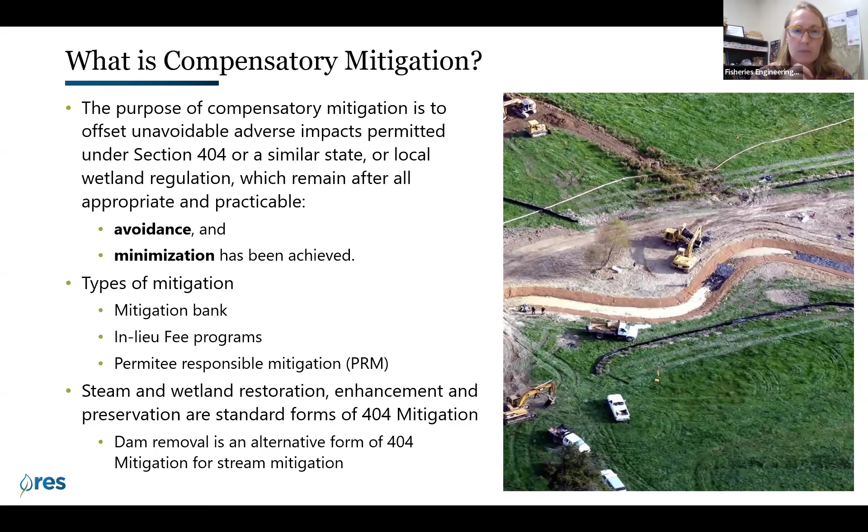All right, so just a little bit of vocabulary to make sure everybody's on the same page. Your IRT is basically your group of regulators, federal and state regulators, who are going to work with and develop your mitigation crediting, review your project, and all that sort of stuff. Your service area is basically where your impact happens, but then also where your mitigation happens. There's different definitions for different states on what that looks like.

So your debit, that's your loss. That's the amount of restoration or improvement that you need to have in your crediting process. And the credit is then just the gain, that unit of improvement of aquatic function at your mitigation site. So we're going to talk a lot about credits today. Creating that credit and what it means, you can sell it, you can buy it, you calculate it. So it's very important to understand that the credit is the gain that you're seeing at your mitigation site.

So the reason why having a known and established crediting process is important is an example like this here in North Carolina, where there was a process that was developed back in 2004, and some dam removals happened from it. But there was some discontent with what that process looked like. And so the Army Corps rescinded the guidance that was developed. And a lot of states were using North Carolina as a basis for their development of a program. It was a reference idea. A lot of people thought it was actually still pretty good.

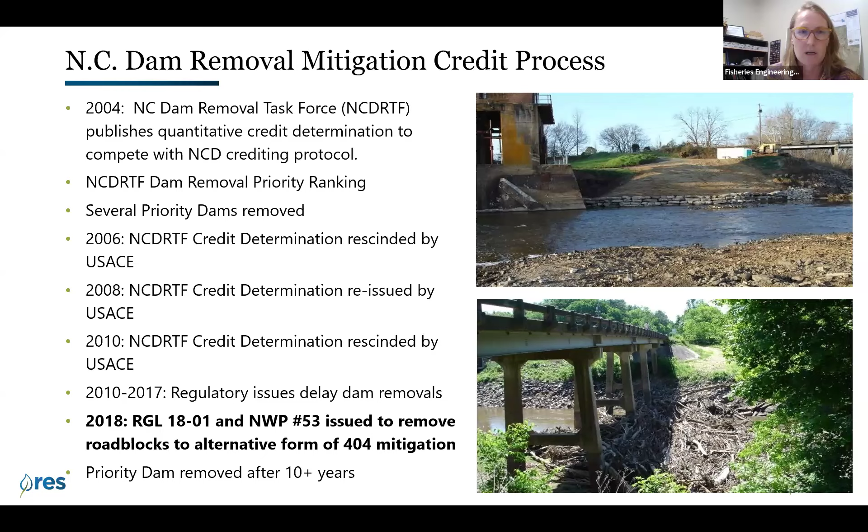So this document is hugely important to developing a mitigation credit process specifically for dam removals. So I want to go through some of the things that I think are pretty key in this document, but I definitely encourage everyone to download a copy of it and read it. So the title of it is Determination of Compensatory Mitigation Credits for Removal of Obsolete Dams and Other Structures from Rivers and Streams.

So the first two things I want to point out is that obsolete doesn't mean these are derelict dams or the ownership is unknown or anything like that. It just means that the owner no longer wants it. It could still have recreational value. It could still be doing something. It still could be providing hydropower, providing some benefit, but the owner of the dam no longer wants it. Therefore, it's considered obsolete. So just kind of think real big picture. Any dam really is applicable for this.

And the other structures part, that means we can talk about culverts. So perched or undersized culverts that are creating an impoundment or a backwater condition can also be considered for mitigation credits. I'm going to say dams and dam removal a lot, but really everything also applies to the culvert removal scenario. So just keep that in mind as well.

All right, so some of the four big takeaways on guiding the understanding about dams and how the Corps should regulate and view the removal of dams is that first, to understand that dams and other obstructions adversely affect stream functions, right? So when you remove that obstruction, you're automatically uplifting your stream condition, you're meeting goals for the Clean Water Act, and you're putting dam removal a bit on a pedestal to say this is a way to restore those stream functions.

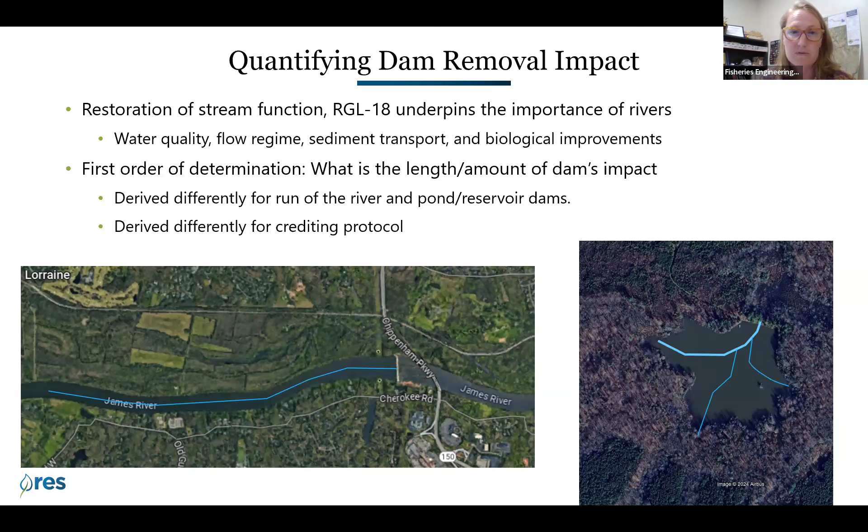And maybe you have to use your impoundment definition based on your state definitions of things. So there's a variety of things to consider based on your type of system and then your crediting protocol within your state or how you want to develop it.

So one of the common crediting methodologies right now is the stream quantification tool. And I mean this for streams, right? Not necessarily for dam removal, but for streams, the SQT is fairly prevalent right now. There are a few guidance documents that have been developed specifically for dam removal and how you apply the SQT to your dam removal system.

So I'm thinking specifically of the St. Paul and the Nashville districts, and they both do call out the application of that guidance document to culvert backwater conditions. If you're doing an SQT methodology in your state, there's regionalization within the SQT. So what a Minnesota dam removal looks like in the scoring might not be what another state's scoring looks like, because they're going to have parameters that are important to their state. So you have to think about that.

And because SQT is so specific in what it's looking at and measuring, the uplift you could see from a dam removal project might not be very well documented in the crediting process through SQT. So there's challenges of classifying function with that direct parameter measurement. That's because you're going from a lentic to a lotic system. It's a completely different system.

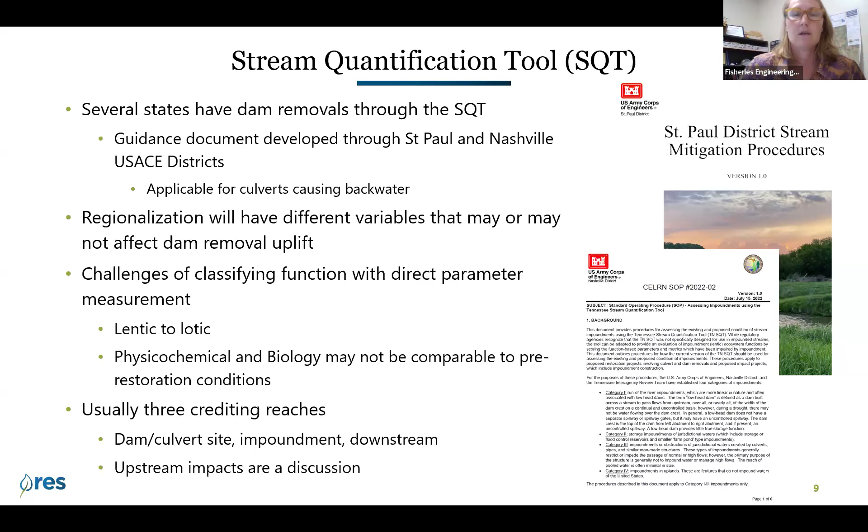So just, that's a word of caution. The one thing I do really like about it is that there's generally 3 reaches for the crediting. So it's at your impact site, so your dam or your culvert, the impoundment itself, and then very specifically the downstream reach of these things. So I do love that the SQT keeps that in mind. And then of course, there's also room for impacts even further upstream, which is a discussion you should have with your IRT on how you look at that.

Another crediting method is through the unified stream methodology. This is not as prevalent. I use it here in Virginia, which is where I'm sitting today. I think it's quite good. We went through a long process. There's some peers, some others in the state that really kind of kicked this off and did a great job developing some protocols for establishing this.

So under the unified stream methodology, credits are really based on your restored stream length. And I mean, restoration is a specific term. So you're meeting the restoration criteria for the state. And then you get to do some additional credits through what is called adjustment factors. Just for clarification, there is buffer crediting that also gets added into this, but we're not gonna talk about that. We're just gonna talk about the river today.

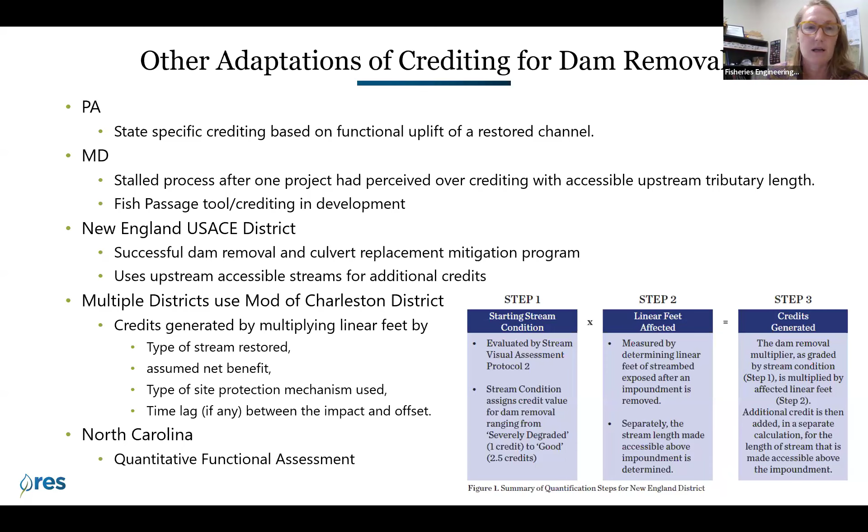It's a matter of starting the conversation. And so if you haven't done this in your state before and you want to get one done, your starting point is really with your IRT. Have that conversation about what you want to do and your starting point ideas of crediting. Now, especially if they've never done a dam removal, they could be very concerned about this being within your state allowance, especially if natural channel design is codified in how a restoration has to occur or how you evaluate your restoration.

So, really getting into this is an approved alternative, reference RGL 18, start talking about it, use examples from other states. Just bring in, this is not new, right? So bring in examples from other states, but start with that conversation.

Several states also have existing state dam removal task forces or aquatic connectivity teams. Those are great resources to maybe tap into to help develop the crediting, right? It's a big process to develop the crediting. It's not necessarily a one-person job. So you want to think about the unique cases for your site, your situation, but also the broad view of what's important in your state.

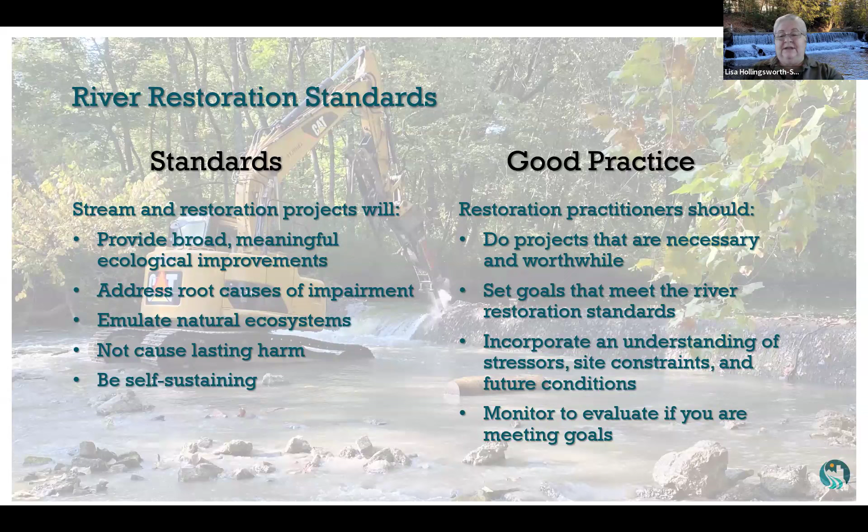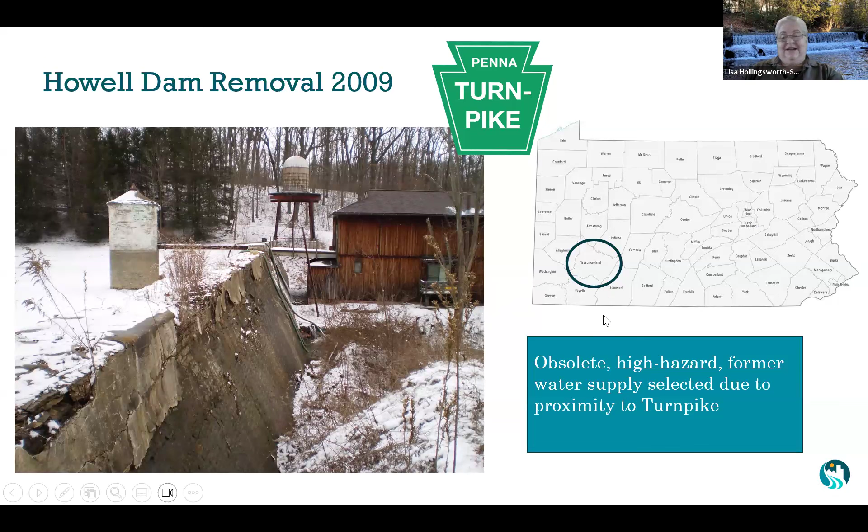So let's go to my first project. This was done in 2009. All of the advanced work was done before I came to American Rivers, and it just was a project that I took over. So you can see a picture here. There actually was somebody living in this house that was originally part of the waterworks itself. So it was kind of crazy the first time I saw it.

So the before and after picture, and just a little quickly about the lessons learned is that, right away it became obvious that dam removal was a worthy instrument for transportation. And this was a site that was actually a water storage impoundment. And there were several stream channels within that impoundment that were able to be counted for mitigation credit, as Kathy mentioned in one of her points.

But the thing that I learned is if you're dealing with a storage impoundment, you better dewater that thing for at least a year before you start dam removal. We actually had a pump and were trying to draw it down the week before construction started, which was really, really foolish. We wound up not being able to create some of the stream channel that we needed, but we did substitute wetland. We accidentally created 4 acres of wetlands because we were not able to address the stream channel improvements that were needed.

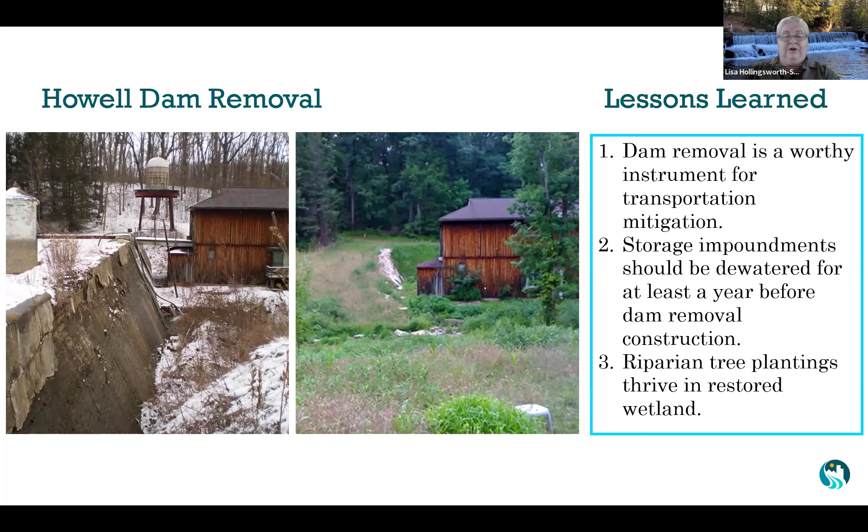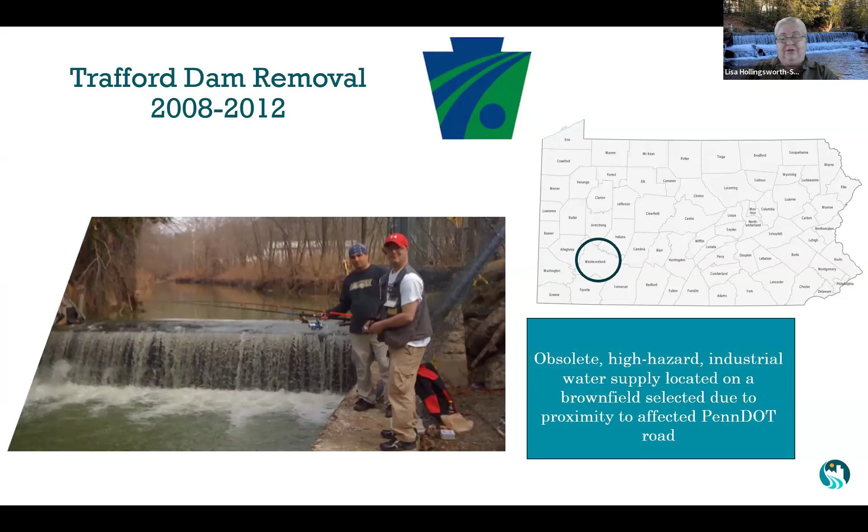The next project was the Trafford Dam removal. So this was an industrial water supply. It was located adjacent to or on a brownfield, and it was selected because the area that they were mitigating was just right in that particular area. Because this was a brownfield, there were severe limits in what we could disturb. And so we could not touch the stream banks because there were industrial materials that had been deposited. So we didn't get the ecological lift from stream bank restoration. We needed to do some grade control structures, and we couldn't move the stream banks to embed the limbs of those structures, and so the structures failed.

We finished this project, and then Hurricanes Irene and Lee came through within 2 weeks, and we lost all of our structures. This high wall that you see in the right picture, at the bottom of it, there's a big pipe that comes out, and that is a major CSO outfall. So we removed a dam at a CSO outfall, which meant that we would have gotten some water quality uplift as a result of the dam coming out, but then we had the CSO outfall right there.

And the thing that really was difficult was that in Pennsylvania, we have Act 2 for brownfields. The soil requirements for brownfields versus the sediment requirements for dam removal really kind of fought each other. And we actually wound up having to do 2 different sets of sampling, 2 different sets of chemical analysis on the same materials, because under the brownfields law, once you take sediment out of a stream, it becomes soil, and then it has to be tested again. So that made this a really complicated project with a lot of cost. It would have been easier had we not had to deal with this.

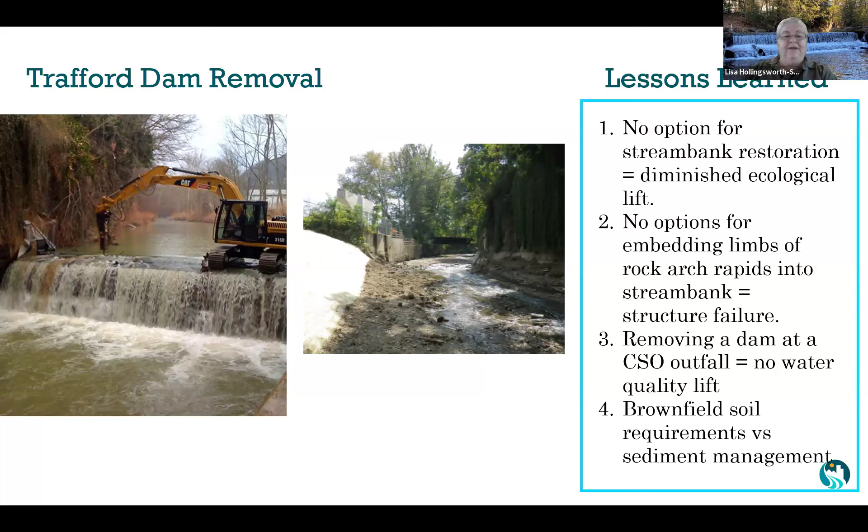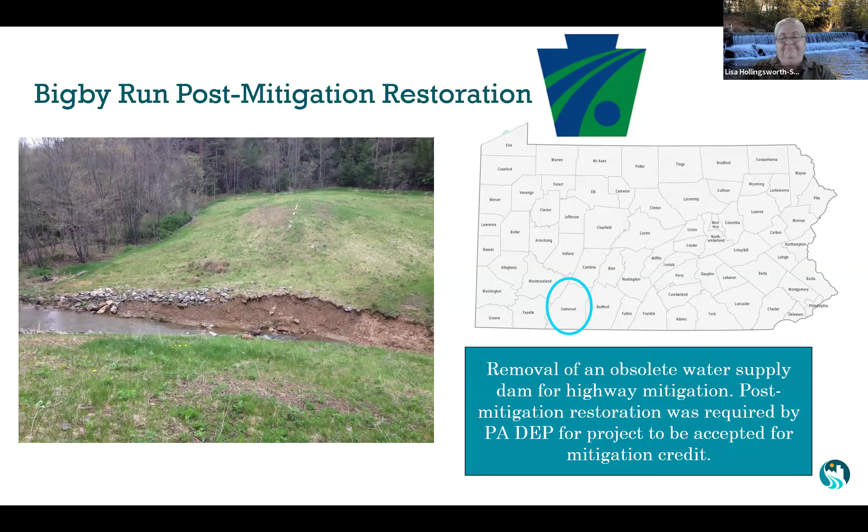Another site. This is also a PennDOT, Pennsylvania Department of Transportation, mitigation. Obsolete water supply. It was a storage dam. So the local government decided that they would accept the mitigation funds and they would oversee the project. And one of the things that I think we all learned is that you need an experienced project manager if you're going to do a mitigation project and deliver on those metrics that you promised. And this is a case where we had to go back to PennDOT, get more money, and undertake a second phase of restoration because a lot of things were just ignored the first time around. So yeah, doing it over is more than twice as costly as doing it right the first time. The good news is this project was eventually successful, and it delivered all the metrics for the credits.

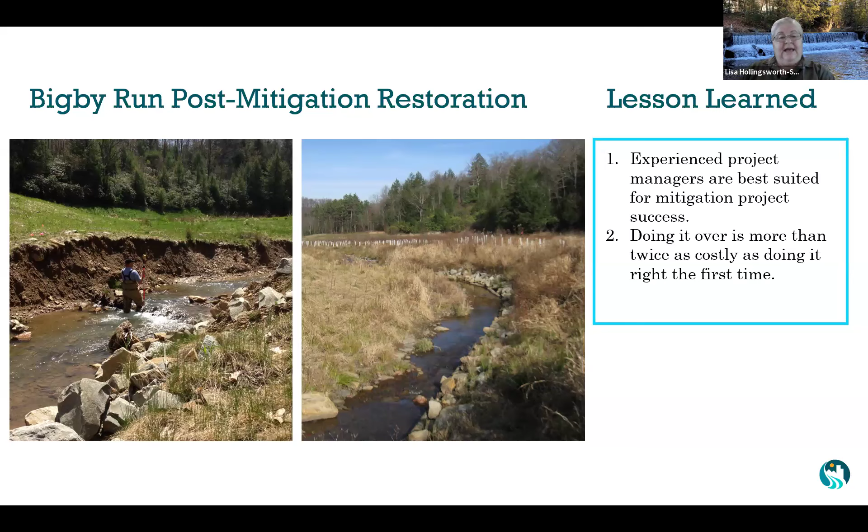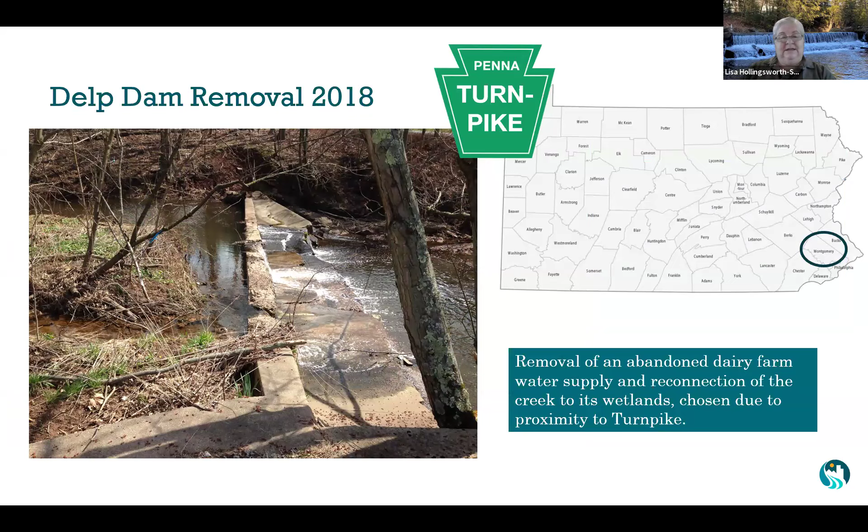This is the Delp Dam removal. It was an abandoned dairy farm dam, and it was chosen due to proximity to the turnpike and also because there were adjacent wetlands. Unfortunately, there was a lot of reliance on engineered structures, and we wound up creating grade control structures that were actually larger than the dam we removed. And this is one that was a turnpike commission.

It could have been a really great project, but the context was basically not considered. We had a great opportunity to restore some floodplain, but there was a plan to put in a sewer system lift station adjacent to it, so we lost that opportunity. It was a clear case of it was chosen for convenience, close to the site where the mitigation need was being generated, but it really did not deliver ecological lift.

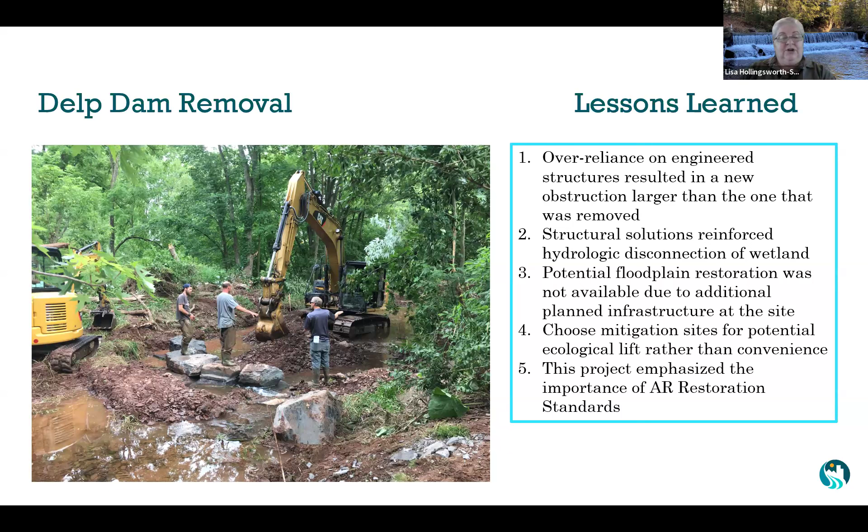And this is a case where it really shines a light on the importance of our restoration standards in terms of making sure that you're getting what you pay for. This dam, the last one that I'm going to be looking at, was an obsolete industrial water supply. This was the permitting managed mitigation. The site was selected specifically for its ecological lift. And then the design and the permit had already gone forward with American Rivers funding.

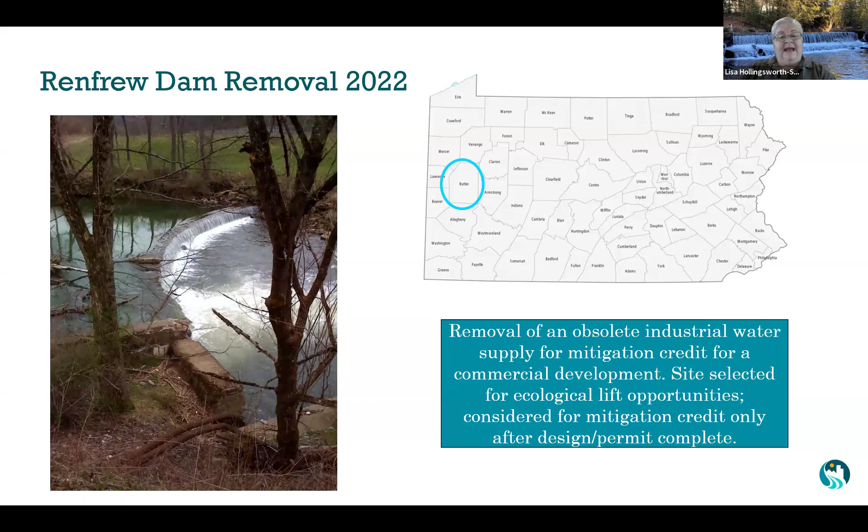And then we used construction money from the mitigation bank that the permittee had to have. And so what we learned from this one is that if we have the advanced planning and we've identified a good opportunity for mitigation credit, we can actually get better ecological lift by taking it on in that order.

The river context: the dam was located right below the confluence of the main stem, Connoquenessing Creek, and a tributary, Thorn Creek, and it provided more than enough mitigation credit to satisfy what the permitting needed. The dam removal was exceptionally cost effective for the developer because they didn't have to pay for the design and the permitting that was already done.

We also used this project to demonstrate to a foundation funder that investing in mitigation projects and getting them ready to go was really effective. We also learned the hard way that keeping the MOUs in a straightforward manner really helped. There were a lot of cooks in the kitchen and something was left undone, and it delayed us at the beginning of the process. So that was a little frustrating.

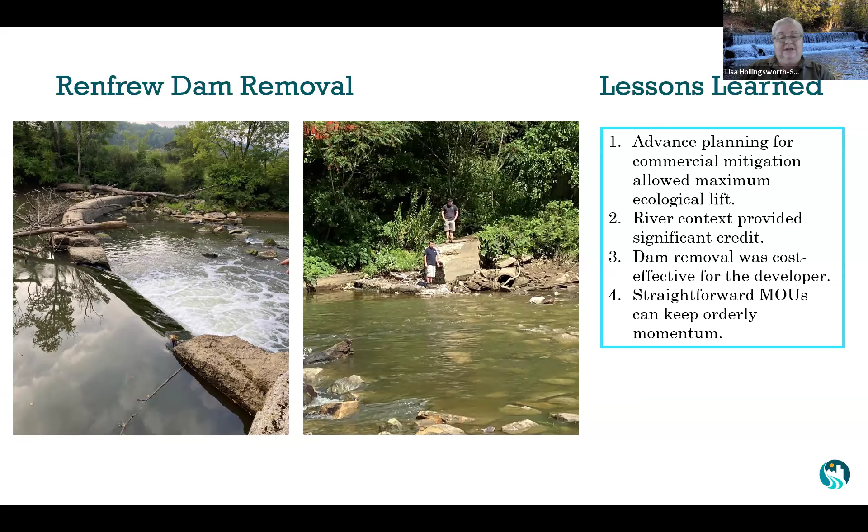So overall, the lesson that I'd like to deliver, the takeaway for today, is that in Pennsylvania, dam removal has been advantageous as a mitigation strategy. And I think it could be applied way more broadly. But one of the reasons that American Rivers was willing to accept mitigation money was that Pennsylvania DEP does a very good job of making certain that avoidance and minimization have been addressed, and that we're just mitigating the things that are totally unavoidable.

When we choose the projects for ecological lift rather than convenience, we get better outcomes. I've been advocating for establishing some criteria for dam removal projects for mitigation, and then using our GIS to prioritize those. When we have competent project management that will make sure that we deliver on the success, the knowledgeable people to make sure that the project is done correctly.

When our restoration standards are fully embraced by all parties, and when we can consider adaptive management in the project, because inevitably, when you do a dam removal design, there's no way to account for every possible condition that you might encounter when you're in the field doing that construction.